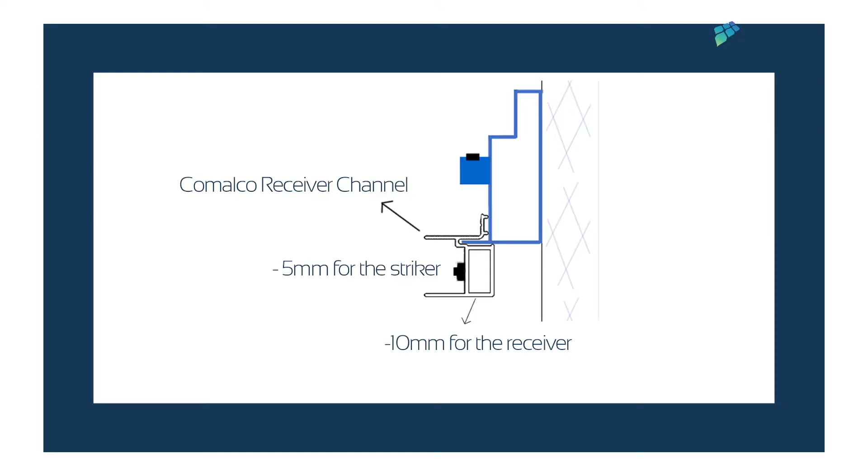How to measure and install a SecureView security screen to a Comalco OX sliding door with custom tracks. Before starting with the measurements, check the accessories you'll need for this installation. For this one, we need a Comalco receiver channel, a top track, a flat interlock, an F interlock and a

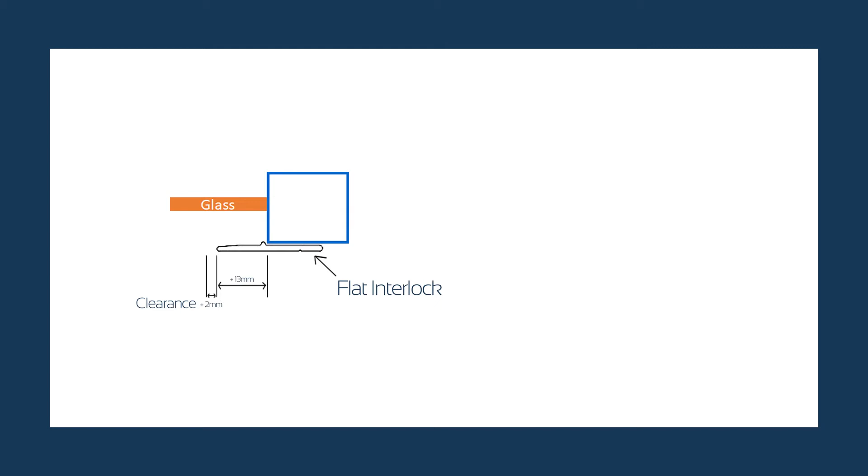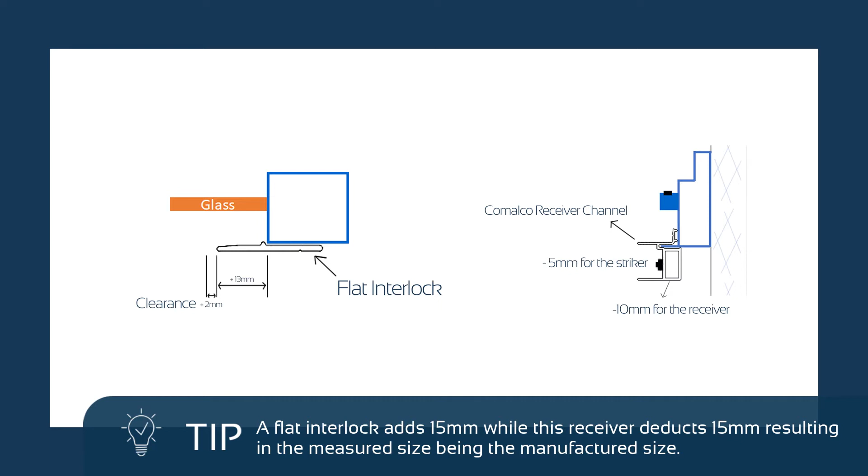bug strip. We start by measuring the width from the inside of the jamb channel to the back edge of the centre mullion. This measurement is 1,365 millimeters. A clever person designed the Comalco receiver channel so that when combined with a standard flat interlock, no deductions or additions are needed. A flat interlock adds 15 millimeters, while this receiver deducts 15 millimeters, resulting in the measured size being the manufactured

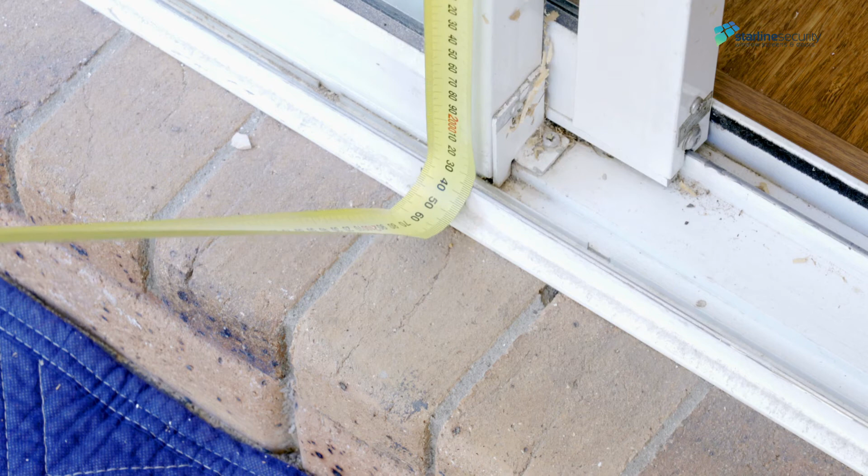size. Measure the height from inside of the top track, placing the measuring tape from the bottom edge of the existing top hung roller to the bottom pip track. Measurement is 2,035 millimeters. For this installation, we'll deduct 22 millimeters for the manufactured size of 2,013 millimeters.

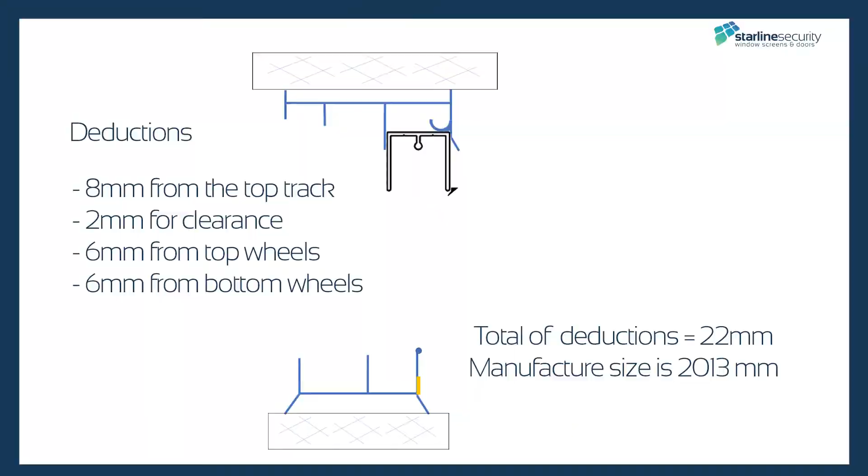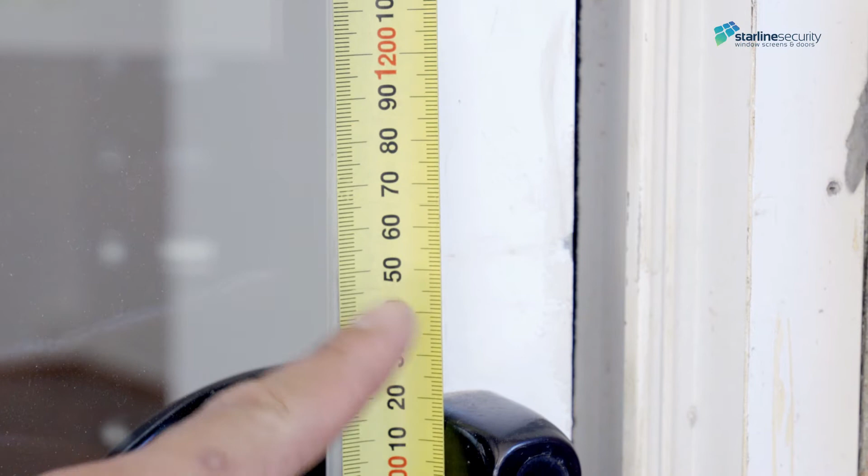Measure the lock height from the bottom pip track to the top of the existing lock for your lockbox bottom. The measurement is 1,120 millimeters. For the security screen, add 30 millimeters for a manufacturing size of 1,150 millimeters.

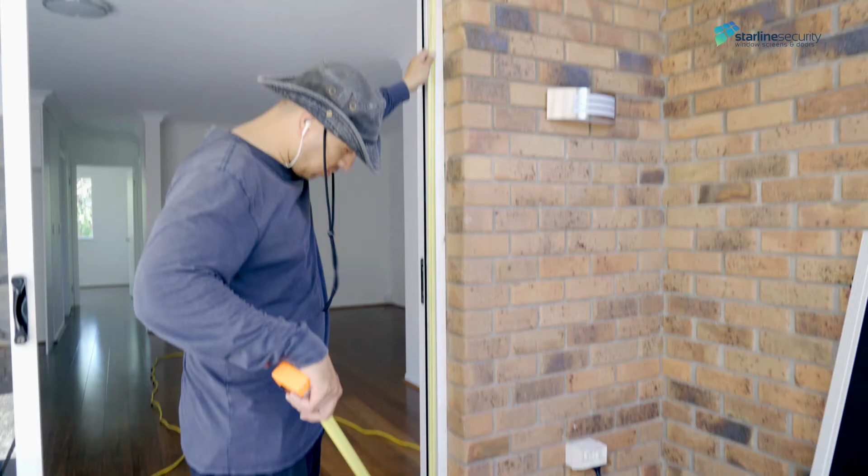Measuring the receiver jamb. Measure the receiver from the top hung track to the bottom edge of the track. Measurement is 2,053 millimeters. Cut to size. Fix off the track to the jamb with panhead screws.

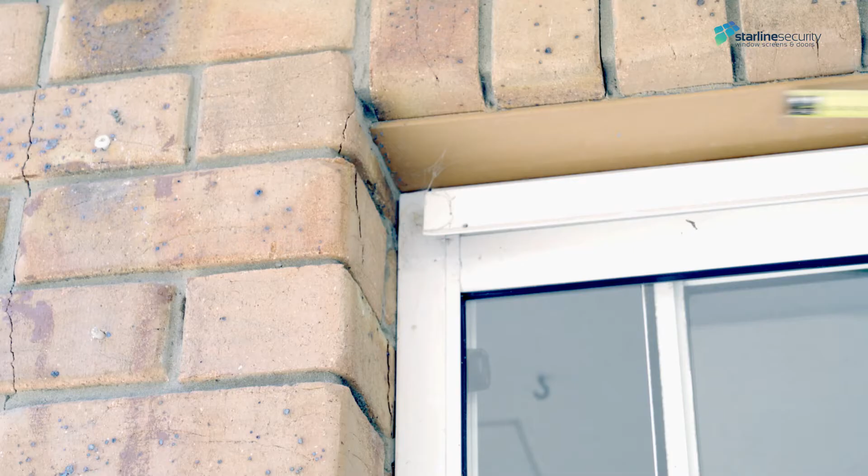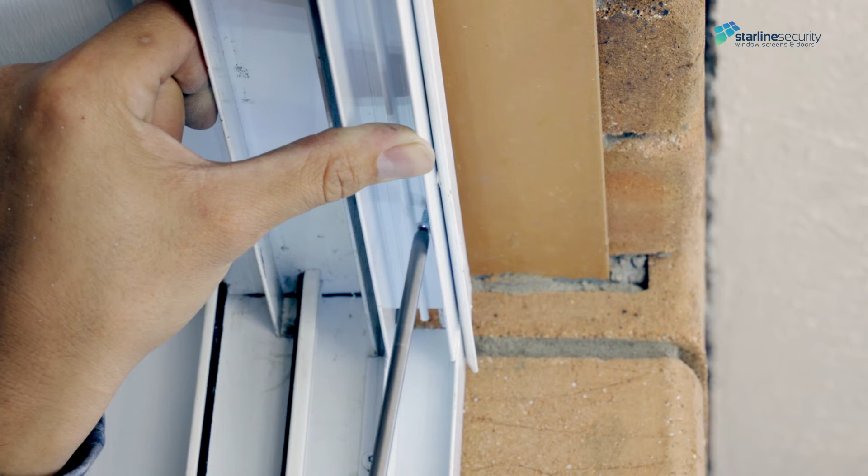Measure the top sliding door track, measuring from the added receiver jamb fin to the back edge of the track. Measurement is 2,638 millimeters. Cut to size. Install snapping into position and fix off with small tapping screws.

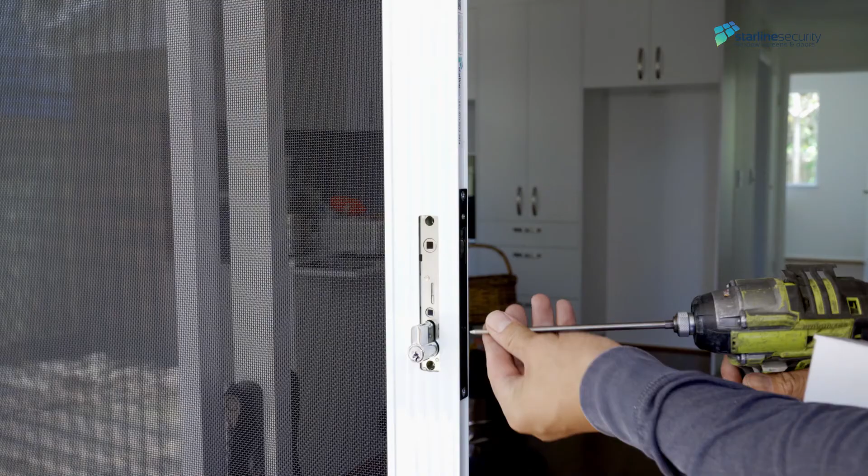Installing the door. First, attach the top guides. Then lift the door into position. Adjust the wheels for squareness. Install the lock and face plates, then insert the strikers. Engage the lock to peel the tape and close the door. Unlock the door to reveal the strikers and fix the screws.

Reinsert the security door and measure the F interlock. The measurement is 1,930 millimeters. Cut to size and fix off with security screws. Finish by measuring and cutting the bug strip with the door in a closed position. Add pile, crimp the ends and fix off with self-tapping screws.

Well done! Another successful Starline Security installation.